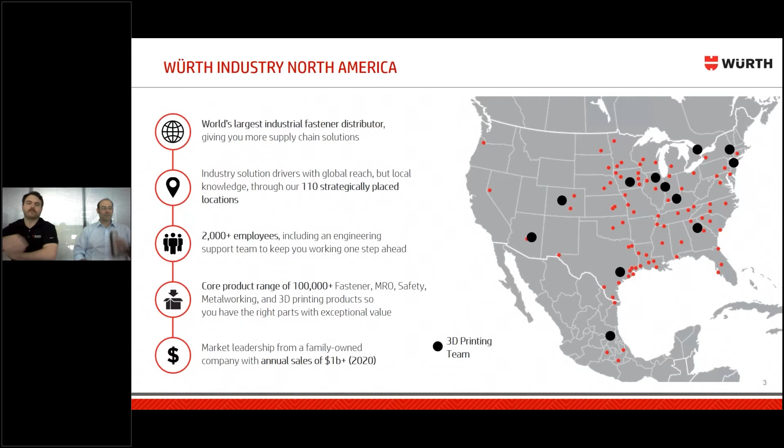As we look at it, what we brought to the table to all of those men and women who are out helping OEMs today is by really concentrating on problem parts. When we looked at Würth's offerings, our skill set is really in those high run commodities where we can use our logistics network, our warehousing, and our connections to drive down the cost and keep the space on your floor at a minimum while keeping your cash flow high and your cost in line with the quality.

As we service customers, you start to get further out where the quantities aren't as high, and you started to get a lot more labor associated with managing those parts for both us and our clients. Those were historically problem parts because they were not easily replaced with traditional manufacturing. That could be that it was very complex geometry, or that it required tooling that maybe you don't want to reinvest in if you only need a small amount.

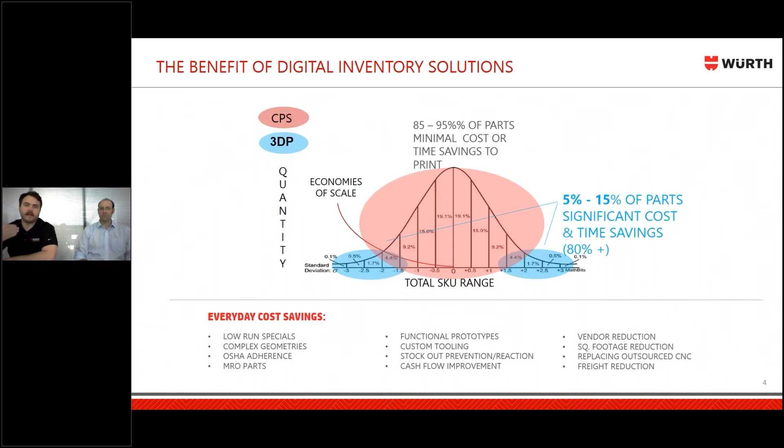Or maybe there's minimum order quantities that really doesn't make sense with your level of consumption. And that's where we're plugging in additive, is in those low run specials, those pain in the butt parts, where as you look across your total SKUs, those are usually the parts where it might be one vendor for one part number or one vendor for a couple part numbers, and all of that adds to your administration costs in your inventory programs.

And so we attack it through the total cost of ownership. We know that every time someone has to click a button, touch a box, or get in a car, that's little fingerprints of gold. That's little bits of money all over the place that your company is subsidizing. So as we look at ways of cutting out a few steps in that process, we view that as little fingerprints of gold that are now not being transferred into an outside service or a laborious process. It's going directly back into your checking account.

And so as we kind of attack those oddball parts, there's not one machine for every job. Similar to a machine shop, there isn't just one piece of equipment throughout the facility. There's numerous to maximize your efficiency.

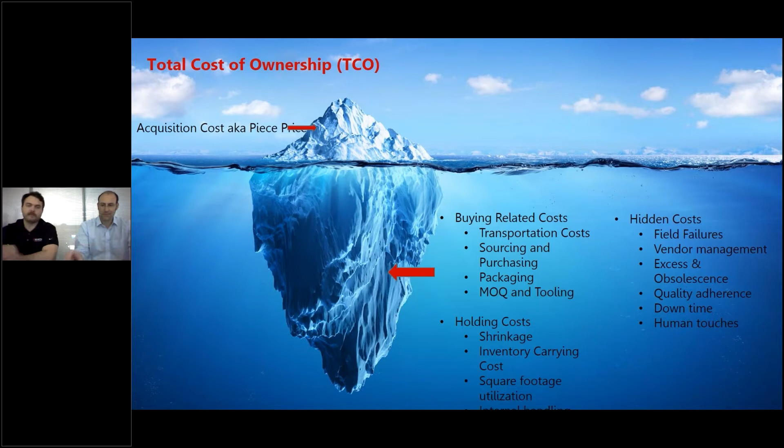And I think that really leads into why we're talking with Arburg: we want to tackle as wide a range of problems as possible, because we do have customers from potato chip manufacturers to cattle farms to OEMs to space agencies, where one technology and one approach is not going to do the job for everyone.

That's when, with our goal of implementing digital inventory programs, we start to look at what tools they need in the toolbox. And that's really where the Freeformer stands alone in terms of flexibility and the creativity we're able to see from customers. And with that, I'll hand it over to Jerry. Thanks, Adrian. We wanted to highlight a little bit about the pedigree of the company.

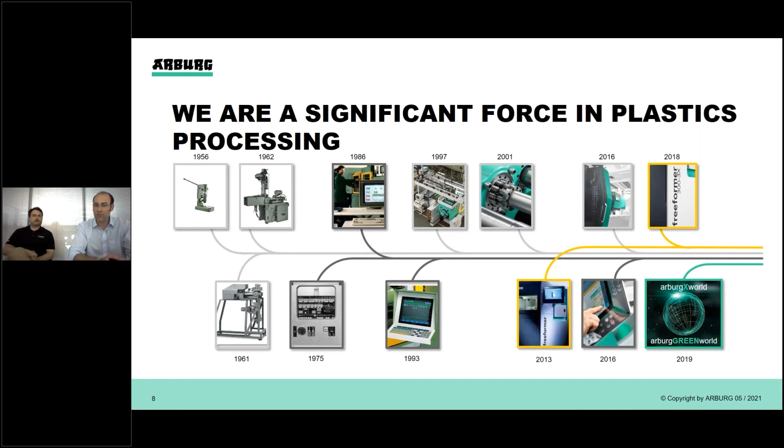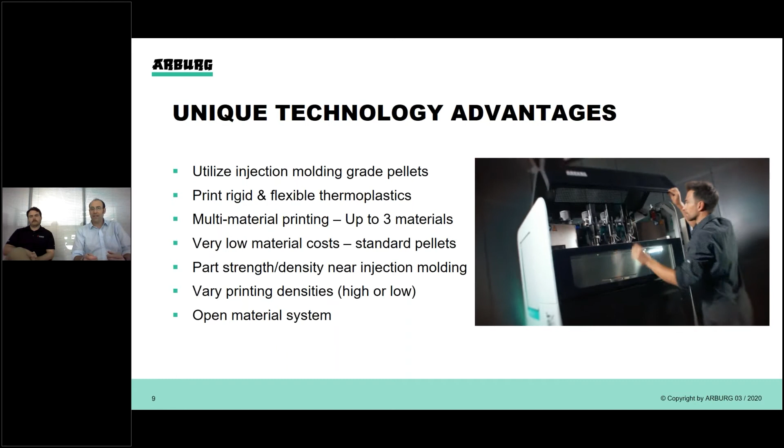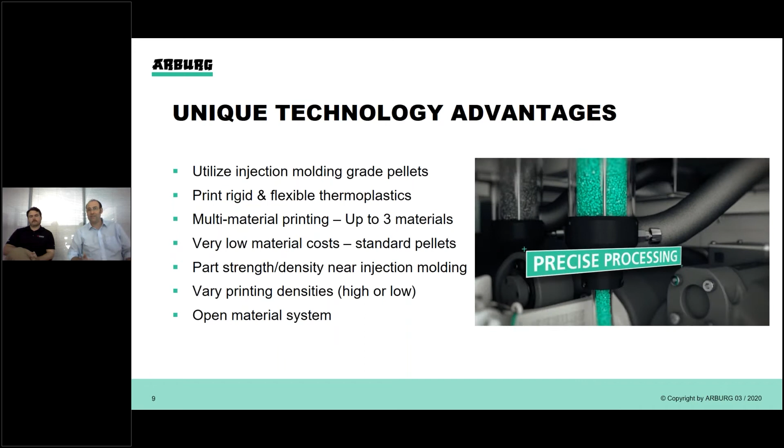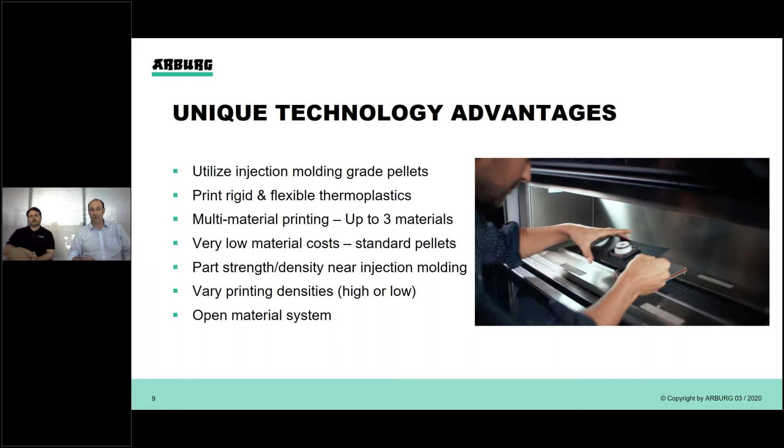So when we talk about the Freeformer, there's quite a few unique advantages to this technology. The first thing we look at, and this really helps separate us from the pack, is the fact that it is an open material system - there are some open material systems out there, but we combine that with the fact that we utilize injection molding grade pellets. As I showed you before, we specialize in plastics processing and have been doing it since the 50s. We took that expertise to create a new style of 3D printer, one that uses real production grade thermoplastics, not filaments, not powders, but the same material you'd put into an injection molding machine to get your production parts made.

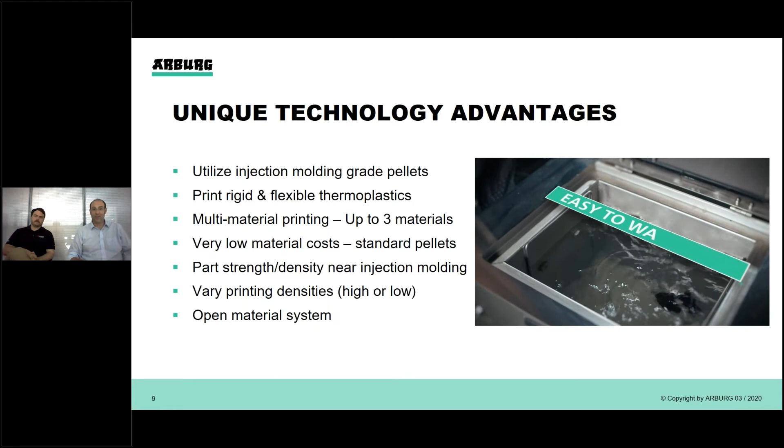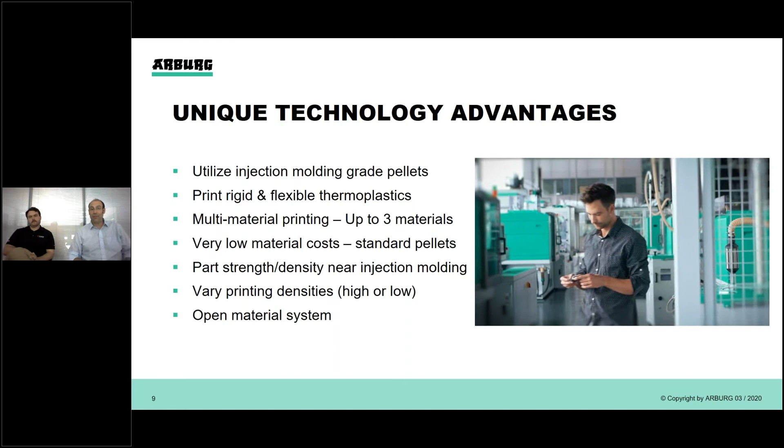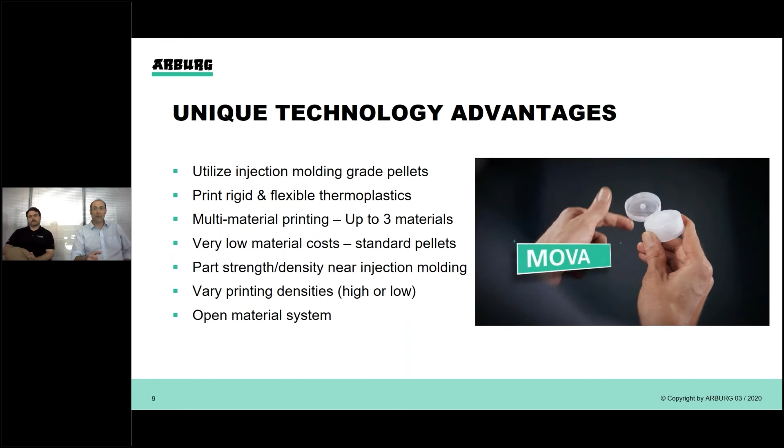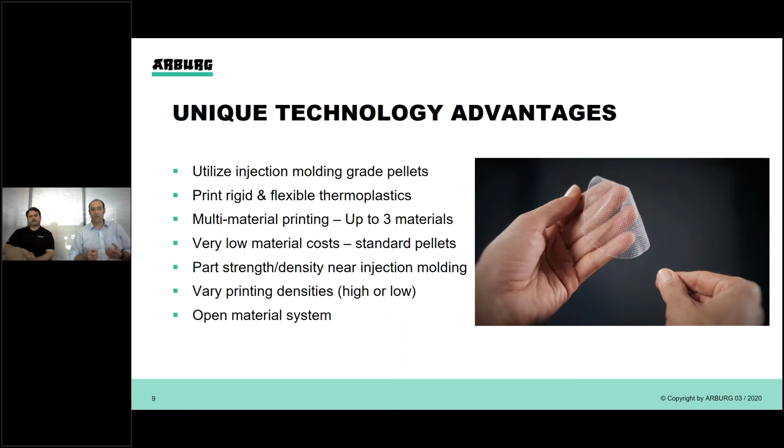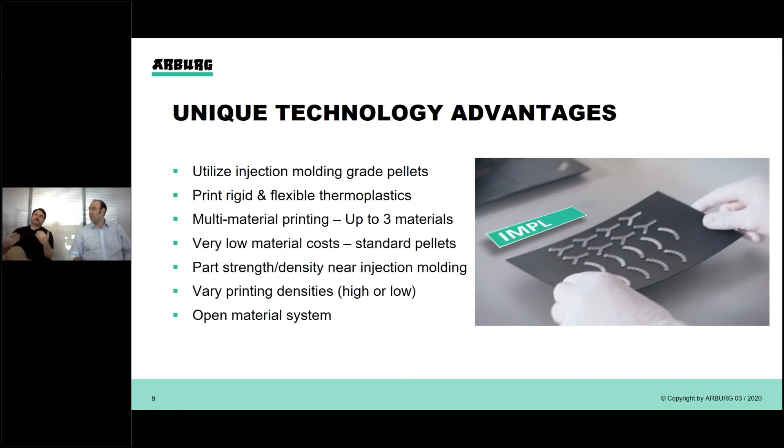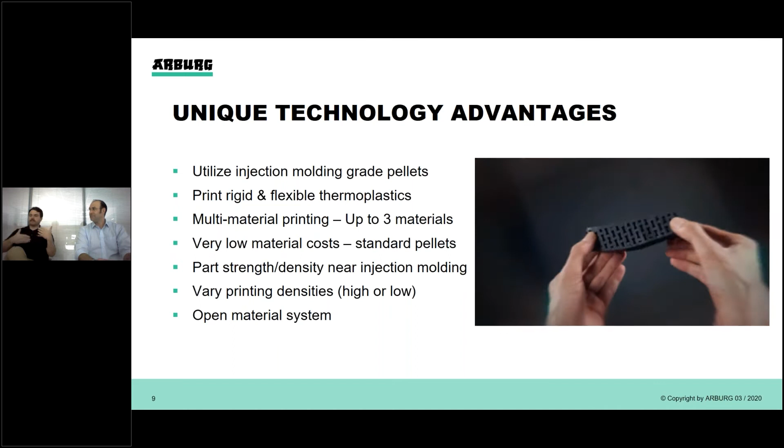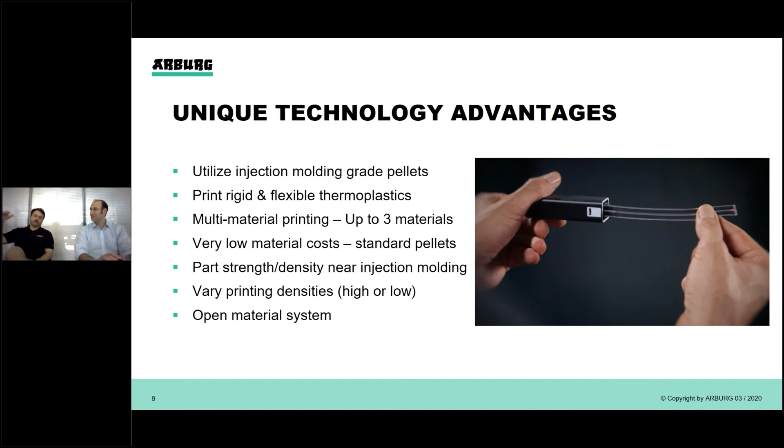And you can't undersell that either, Jerry. That jump between additive plastics and traditional injection molding plastics - it's that increase in additives you have to bring in to make it go through a filament or something like that. People are, you mentioned your history of 60, 70 years with injection molding, so people are walking from one machine, taking a scoop and going to the printer. That's the basic idea, yeah. And I think if you're in that, it may sound somewhat...

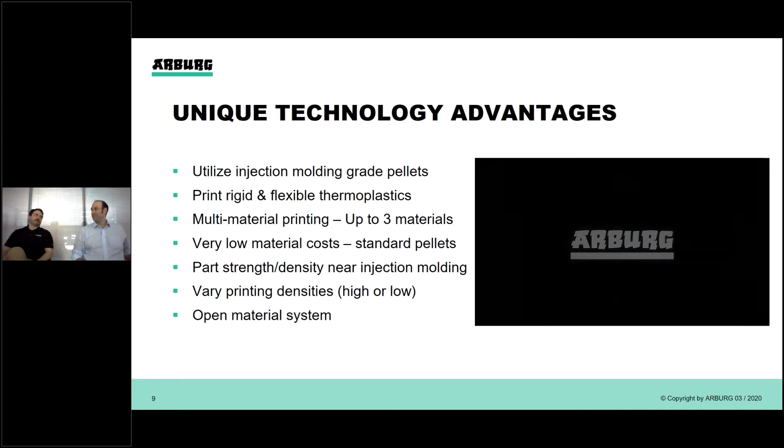Every day, but I think for people in additive, that power of going to an industry that's decades old and being able to pull from that product portfolio, that material portfolio, is pretty powerful when you're trying to recreate old parts or keep your material specs the same. We think so, especially when you're looking at production. Keeping the cost of material low allows you to look at it, whether you're doing injection molding now or have a brand new part just introduced into the market - it allows you to look at our additive solution as a potential production solution.

The last thing I'll mention is part densities. We can vary the densities of the part and do a lot with customizing it. We can push it towards the maximum and create parts very close to injection molded quality, or go fully the other direction and customize parts with different densities. Here you see a part where the ring around the outside is printed at 100% density, while the inside has a very flexible, soft filter-like material at about 15% density. The cool part is it's flexible to start with, and since we're using real thermoplastics, it's very durable.

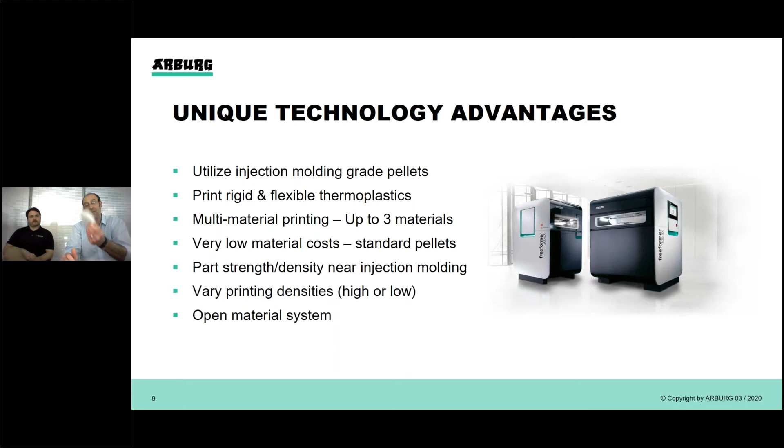So we'll talk a little about the process itself. I mentioned we used our plastics processing knowledge, and when I say we used it, I mean we really exploited it. I like to look at our technology as half an injection molding system and half a 3D printer. If you start at the top right, we've got a standard hopper where we load our pellets in. It falls down into a screw and barrel, just like a molding system, and that screw pushes the material forward, melting and plasticizing it as it goes.

Then we push that into the 3D printing half, where a piezo actuator is opening and closing a nozzle. As we open and close that nozzle, we create micro droplets. That's a huge advantage of this technology - we're printing a thermoplastic and pushing it out a nozzle, but it's not a filament, it's actually a micro droplet. The droplets seep into each other layer after layer very nicely, creating a compact, dense part.

I'm used to what a lot of people will probably have, the FDM, hot glue kind of printer, where layers stack almost like Lincoln logs, seaming on top of each other. That's also historically where 3D printed parts break - in between the seam. This seems almost like instead of building a log cabin or log wall, you're stacking rocks to make that wall. Individual drops are being nested together, and you're changing the space between those to change the density as well. Exactly.

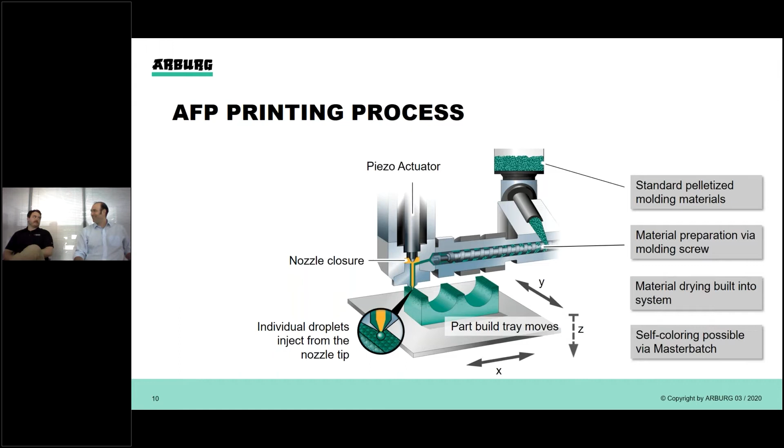And here's a great depiction of that. The block right here is what you're seeing. We printed different densities - it's hard to tell on screen, but each of these blocks has a different density. Really the simplicity in it is all we're doing is spreading those droplets out to create a lesser density part.

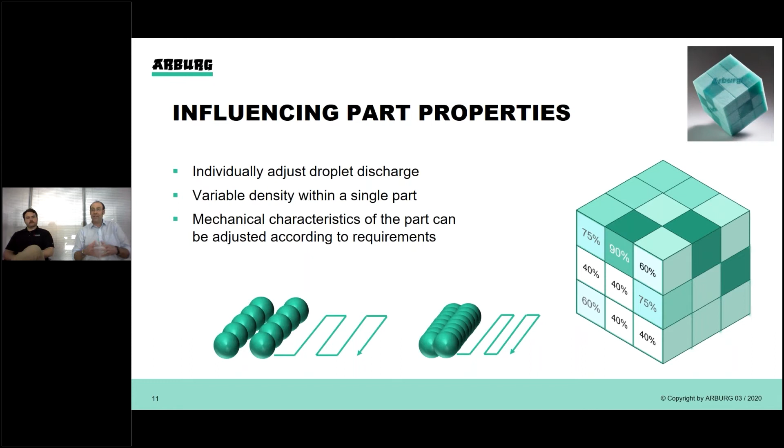If we go in the other direction, what we see here - and we've got a video on the right which I'll explain as it goes - is a block printed in polycarbonate. This was a Covestro material called Makrolon. I'll throw out the disclaimer that this part was polished on both sides to attain that clarity; it did not come out of the machine that way - we like to stay honest. But the reason we did that is not to show a clear part, but to show you the inside of the part, how dense it is, and that there are no air bubbles in there.

That video that was operating on the right-hand side is actually a CT scan of that part. And what we were looking at, all of that black, that's material going all the way down. We were basically looking for air bubbles that we didn't find.

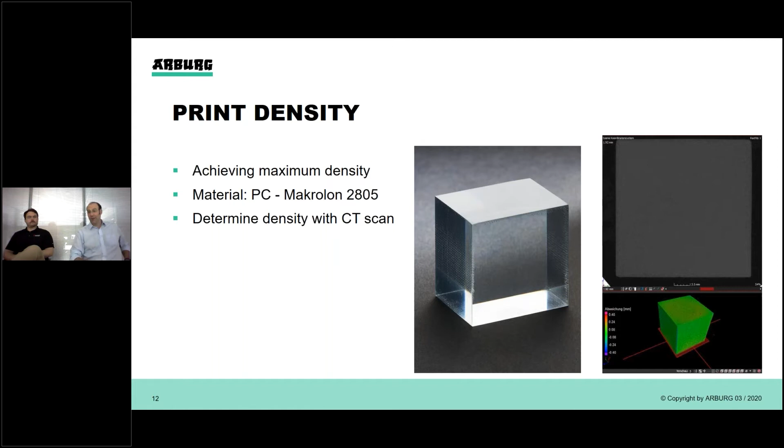As we move forward, we've talked a little bit about the technology and what it can do, and everything we've shown so far has been single material. So let's take a big step forward. I mentioned towards the beginning that in 2018 we released a larger system. Our larger system actually has 3 nozzles instead of 2, and 3 nozzles allows us to do multi-component, multi-material parts.

It can be rigid and rigid, rigid and flexible, flexible and flexible. I like to say, as long as those materials play nice together within the heated envelope as they're printing, then we can print them together.

A great example would be if we were looking at something like an ABS and maybe an Ultem, where the oven range is so different that it might not make sense to put them together. But an ABS and a TPU, or a PC ABS and a TPU, or even ABS and PC - those we can all print together.

And really what it's looking like is we've got a black rigid component with a red TPU or flexible gasket built right into it. And I think some people might go, well, gaskets, what? I think coming off that machine, as the operator, with your proprietary process, you're getting that seating very firmly against your base plastic.

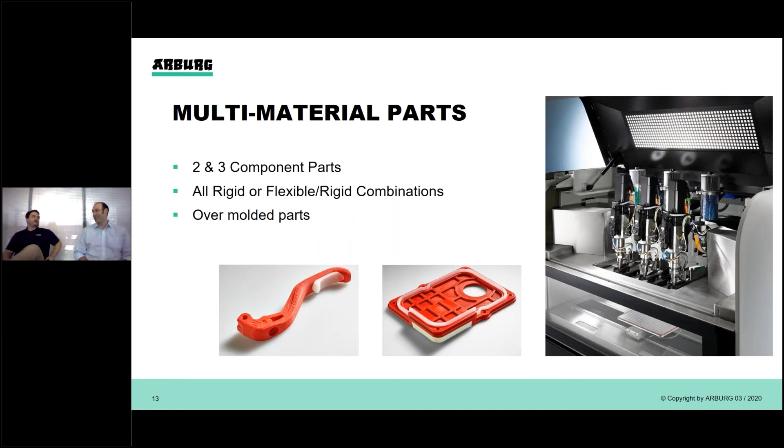Some other interesting and unique abilities - let me grab a great example we've got here. I used to get asked a question throughout my career working with different technologies: can I 3D print on something? And I never had a good answer, unfortunately, until now. Hopefully you can see this okay, I'll move it around a bit. But this is a black aluminum plate that we 3D printed PPE directly on.

And this was fairly easy. We actually created a fixture for this, put it onto our printing plate, bolted this onto the printing plate, and then printed directly on it. And this type of flexibility is brought to you by being able to have that open system with the ability of running materials, but also the software tied with it that really allows you to manage every bit and spec on that system to make it do what you want.

Whether that's printing on something, or adding an insert into printing, or adding robotics to make a lights-out 3D printing, manufacturing, and assembly set, that could all be done with a Freeformer. In fact, Arburg creates a lot of robotics, which we call turnkey systems, for our molding system, and we can do the same thing for the Freeformer. I think there's even videos online of some of that being showcased. There certainly are.

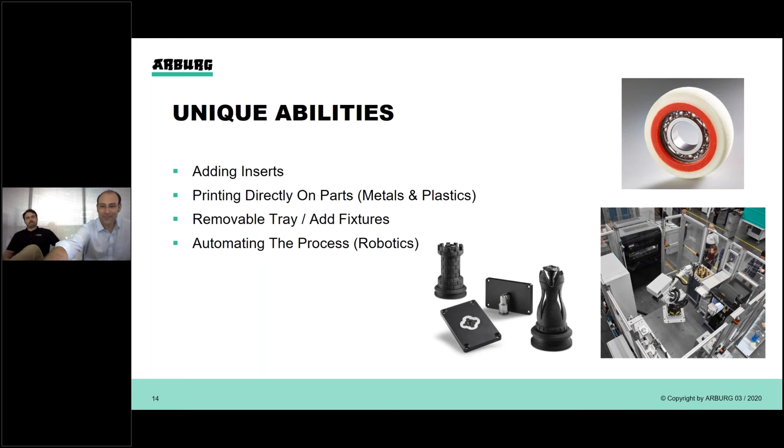Most of these being around functional prototyping, being able to use the material that the company needs to create the parts they're looking for. If you're going to do R&D on parts, you should be printing in the material you're going to go to mass production with. Why start with a different material, come up with a form, and then have to go create soft tooling or an aluminum mold just to get that same form in the material? Let's cut that two-process system down to one process.

They need to trial it on the Freeformer, then take it to an Arburg injection molding. So they need to probably, gotcha. There you go.

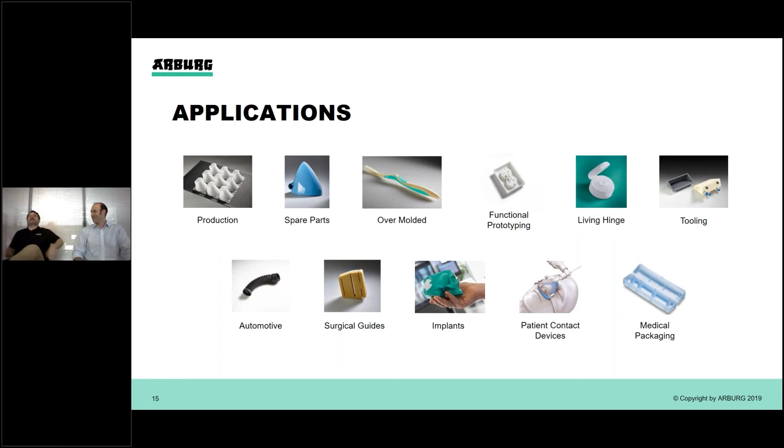So let's jump in. The last few slides that we have here, we've done a handful of case studies, and I grabbed a couple of interesting ones just to showcase these hot applications, stuff that I think is just really cool and interesting. So what we have here, this is our first story, and all of these case studies are available either on our website or also on the Arburg website.

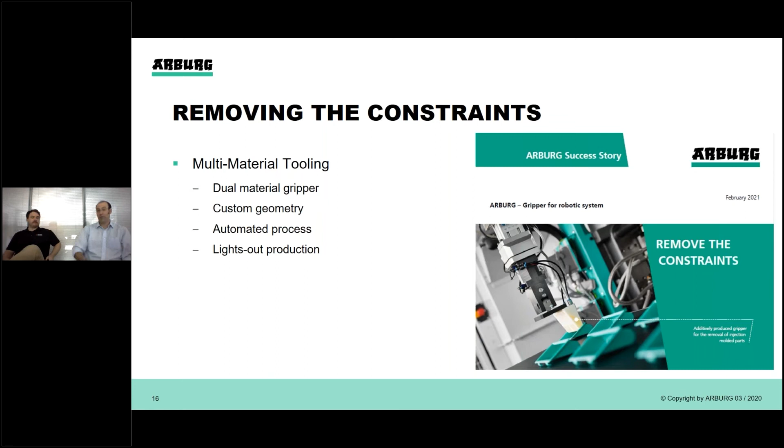Yeah, it's a great point. So moving on to our next story, this is all about prototyping, the power of prototyping. And a great story towards the beginning of COVID.

Arburg in Lossburg, Germany, wanted to help the local area surrounding them, the local hospitals, local communities. So they took on a project to design a face mask, something that they would be able to give away to the public. And they came up with a concept, and they took that concept to production in 41 days, which is a very fast design cycle in my opinion.

One of the main tools that they used to do that was the Freeformer. The Freeformer enabled them to very quickly create a ton of prototypes in different production materials. Not only did they test the prototypes, for the mask, maybe they were testing different materials, different sizes, trying to validate whether or not they need 2 or 3 sizes for people's faces or 1 size is good enough. They also used different materials to test different flexibilities.

They tested the design. It's actually a 3-piece design, so they were able to test the rigid polypropylene bracket that goes around the flexible part, which ended up being a silicone mask. One really cool piece is that they were able to take a production material and use that to run the filter, and then take that prototype filter and practice ultrasonic welding on it. So they could set up the manufacturing process while they were finishing the prototyping - just really impactful when it comes to utilizing your prototypes to help get your manufacturing process kicked off.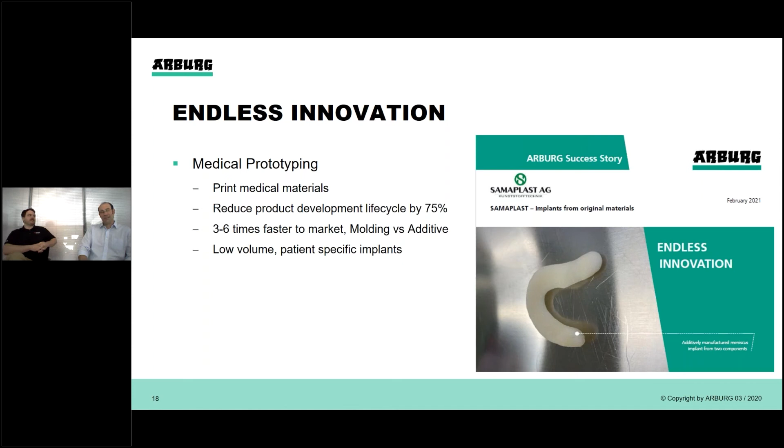So we've talked about robots, now we've talked about the human body. So cyborg is somewhere in between, I'm assuming. Terminator's going somewhere in there. That's good, yeah, that's good.

Second to last is one of the more interesting stories I've seen. This one was a bit of a surprise to me because we print thermoplastic—I had no idea we could print drugs. This is a great story out of the UK.

One of our customers is utilizing technology to 3D print medication pills, using our larger system with 3 nozzles. They're able to put down 2 different medications with essentially a thermoplastic dissolvable binder around them.

What they're finding with the Freeformer is that they're able to change the density, like we mentioned before, and that change in density changes the dissolving rate of the pill in the body. So they can customize the amount of medication a patient gets and how fast it will go. That is groundbreaking for personalized medication.

It's just hard to wrap your head around if you're in product or material development. Like I said, we truly have gone from ingestible pills to robotic arms and things like that.

I think the easiest way to wrap your head around it is that Arburg gives you this really blank slate. It's essentially like here's your easel, and a blank canvas, but we're going to give you any tool necessary to make the exact art that you need to make. That's where you have to wrap your head around the amount of flexibility.

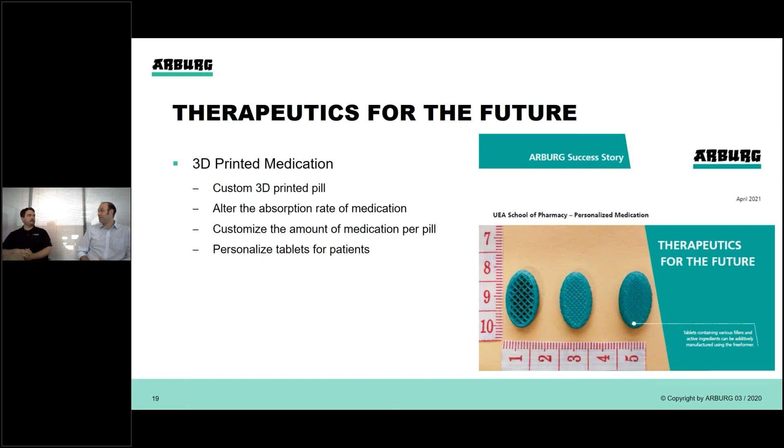Awesome. So the last story I'll tell is all about production. This is a customer of ours in Moscow, and they create these very large strapping systems where you would put a box in and they would wrap either metal or plastic strapping around it for shipping.

Würth owns probably a couple of them, I'm sure. I'm sure, yeah, we've got a couple. I'm pretty sure when Arburg corporate sends me boxes, it's got the strapping on it. It's probably the same guys.

They bought a system because they were looking at different ways to streamline production. They had read about what additive was doing for other companies and wanted to see if they could implement it in their company.

And they came to Arburg. They looked at the Freeformer. They identified over 100 production parts. Some were plastic, some were aluminum. And they worked with Arburg using a special type of nylon that they were able to substitute all of those parts for. Now they are delivering systems with over 100 Freeformer printed parts on them.

But the real frosting on the cake, which they didn't think about beforehand and realized after, was when it comes to replacement and spare parts, for a lot of the consumables, straps running through parts that wear out over time, they would have to go out to third-party companies and get those manufactured, and the lead times were a good two weeks. They realized they can print those in-house in two days and send them to the customer. The quote from the customer was basically, we don't care where our parts come from, we just need them fast. And two days beats two weeks.